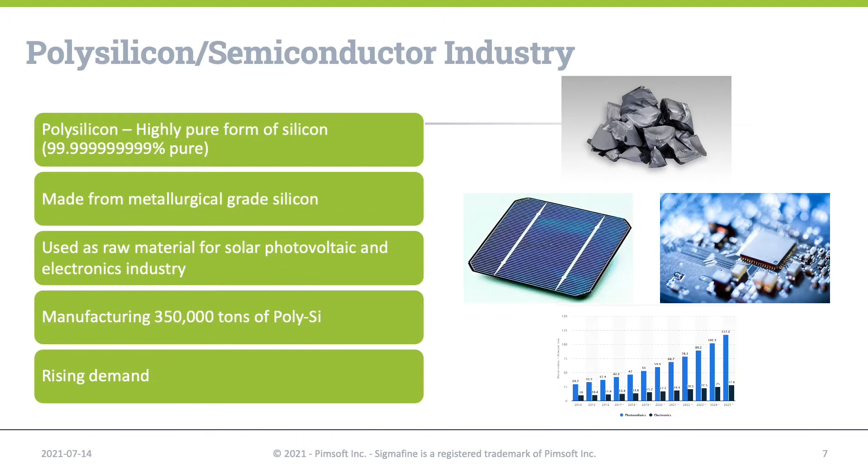Silicon is the second most abundant element found on Earth. Polysilicon is a pure, stable, and crystalline form of silicon made from metallurgical grade silicon. Polysilicon offers properties like other semiconductor materials, and therefore it is widely used in the manufacturing of solar photovoltaic cells and electronic components. Currently, over 350,000 tons of polysilicon is made around the globe every year. And as the demand grows, the production will likely grow with it.

As with many industries, the polysilicon industry has its own set of challenges. Polysilicon is produced in large batches, and there are many intricacies in the preparation and mixing of the reactor feed. Getting the right mixture of the feed is the key to making highly pure product. Also, being able to track the quantities of the movements as well as quantity and quality of the raw material tanks to be able to catch any issues early in the process.

And finally, dealing with an energy-intensive process. Polysilicon is produced with an energy-intensive process which is known as chemical vapor deposition, in which reactors are heated to thousands of degrees Fahrenheit to produce polysilicon. As with any energy-intensive asset in your plant, you want to make sure it is operating with great efficiency to keep the operational costs down.

So before we go any further, let us talk about what Sigmafine is and how it works. Sigmafine is a data quality provider in the real-time digital infrastructure. It is an application that applies a data reconciliation analysis to a model that represents a facility. The data reconciliation analysis is simple. It calculates the inputs minus the outputs minus the accumulation equaling 0.

Sigmafine is configurable to meet your company's requirements. Sigmafine server provides an out-of-the-box set of calculations and analysis like mass, volume, energy, quality balances that can be configured per your needs. Sigmafine has add-ons to extend the basic server functionalities to enhance the user experience. In addition to the add-ons, it also provides extensions for multiple industries like LPG, LNG industries, and domain-specific calculations like energy, thermodynamics, and psychrometrics.

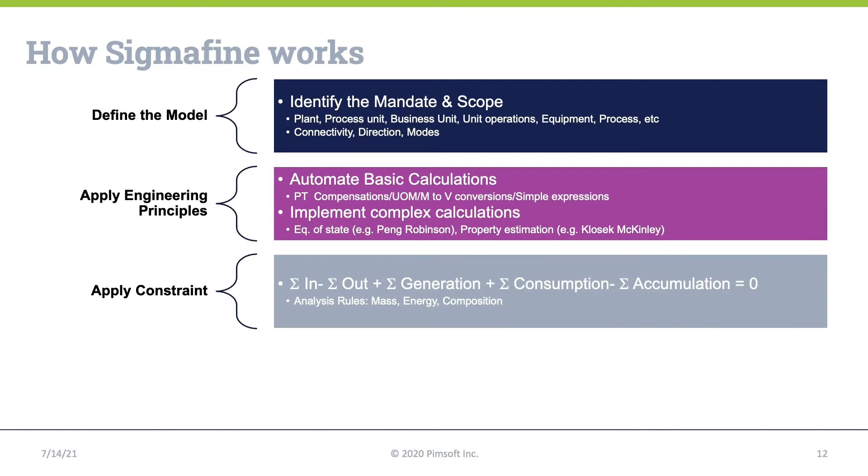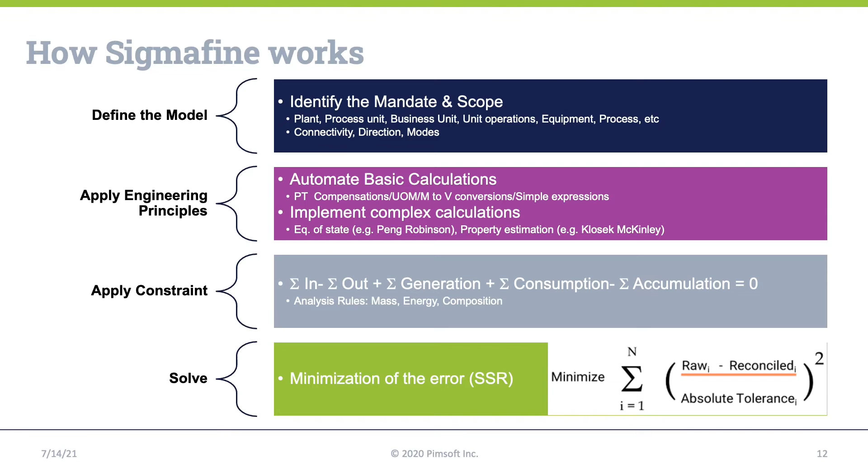After this, apply multiple balance equations to find minimal adjustment to measured data. You can use different analysis rules such as mass, energy, and composition. And then use regression analysis methodology to get an optimal fit of the observed data with minimum adjustments using the equation that you see on the slide. Here we are trying to minimize the errors using tolerances that are set in place.

So you may be asking, how does Sigmafine address the challenges that I spoke about before, and how can it be applied to the industry? Well, with Sigmafine, you can go beyond the normal reconciliation tasks I spoke about in my previous slides.

And lastly, with the built-in energy balance calculation and the thermodynamics extension, you can track asset performance. Now we will see how we can do each of these in the subsequent slides. Let's look at how tracking capability can be used to track the raw materials. Sigmafine does this by the use of material tracking analysis.

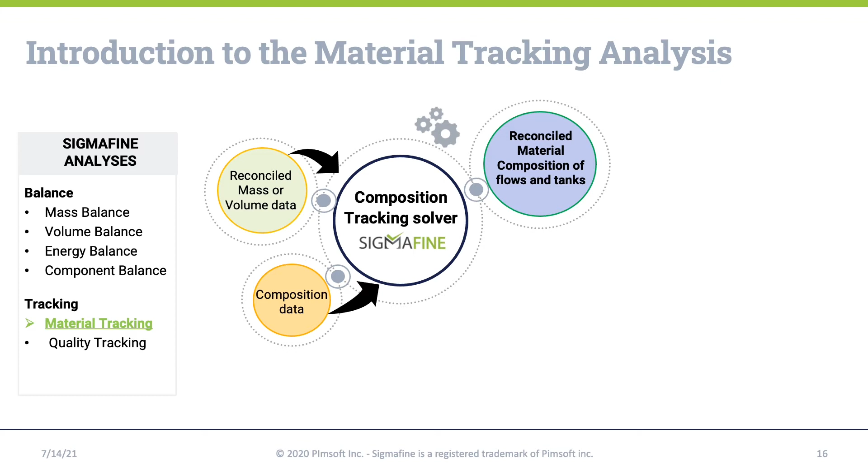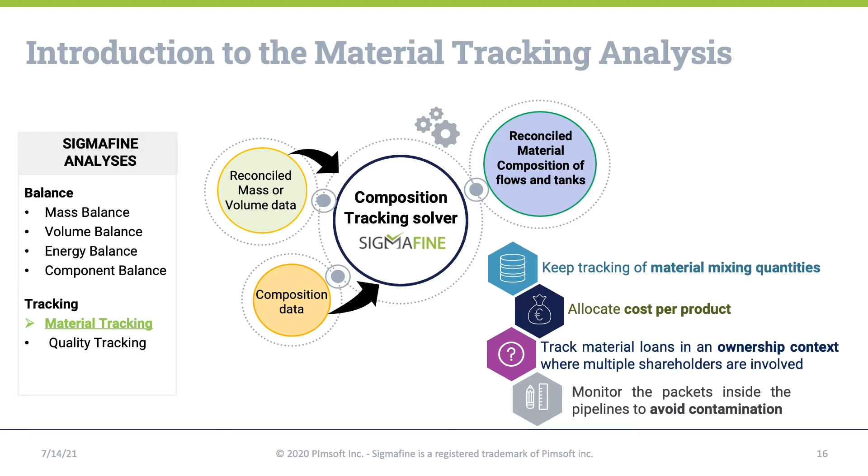This type of analysis uses the composition tracking solver, which brings in all the information such as mass and volume, the input material, and calculates the reconciled material compositions of flows and tanks. The results are then used to keep track of the material mixing quantities, allocate cost per product, track material loans in an ownership context, or monitor inside the pipelines to avoid contamination.

So how does it work? The tracking algorithm considers the following. First step is to execute the balance, the use of reconciled data for good results. Second is to collect all the movements within a certain time. This can be done setting a 24-hour period. Then we decide which elements are part of the calculation. We can use the same model to use for the balance. There's no need to build another model.

In order to calculate the composition of the tank, flows, and the movements, the algorithm considers the way how the materials are mixed in each inventory. In case of inventories that are not directly measured, as this information is not always available, Sigmafine can calculate the inventory based on surrounding measurements, and then tracking analysis based on the results can calculate the material composition. And finally, the algorithm considers the history of the stage. Initial composition of the current day can automatically be taken from the previous day.

As mentioned before, the way materials are moved through the model is defined via a mixing model. You can pick the ideal mixing method based on the type of material and the mixing that will be taking place. Examples of such mixing models are well-mixed model, where you have tanks with homogeneous material, baffled model for tanks with internal baffle, which keeps the input and output separate until the end, makeup purge, where most of the input goes directly to the output line and only the excess is taken from the tank.

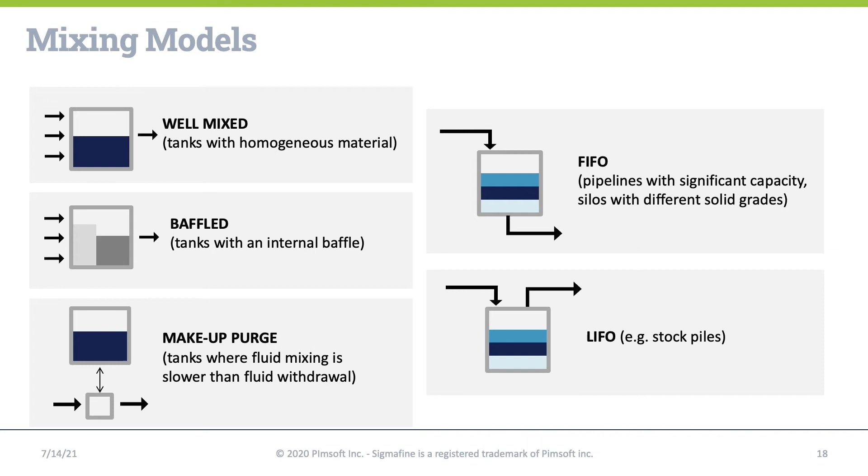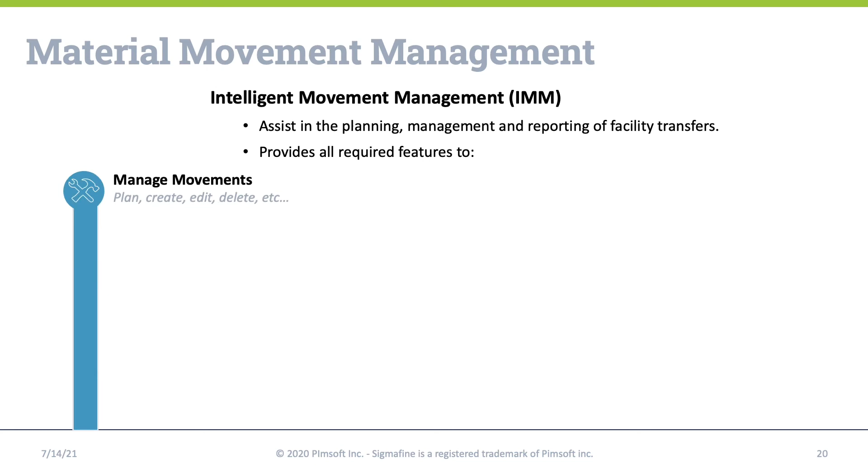Let us see how material movement can be achieved in Sigmafine. Sigmafine offers an integrated way to plan, execute, manage, and report movements of intermediaries and finished products with the help of intelligent movement management, known as IMM. Based on the rigorous mathematical cross-checks, the IMM takes the guesswork out of the movement planning, monitoring, doing calculations, and reporting. IMM tracks the quantity of the movements as well as the quantity and qualities of the tanks in real time. This enables users to detect errors early in the process so a problem can be prevented.

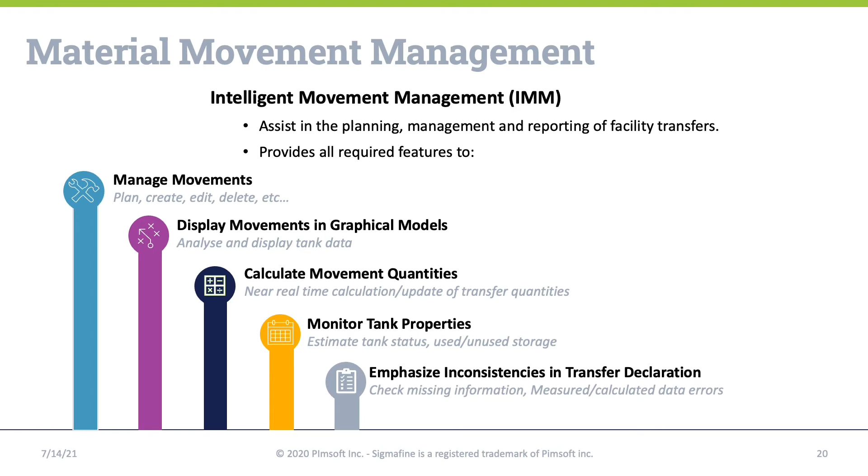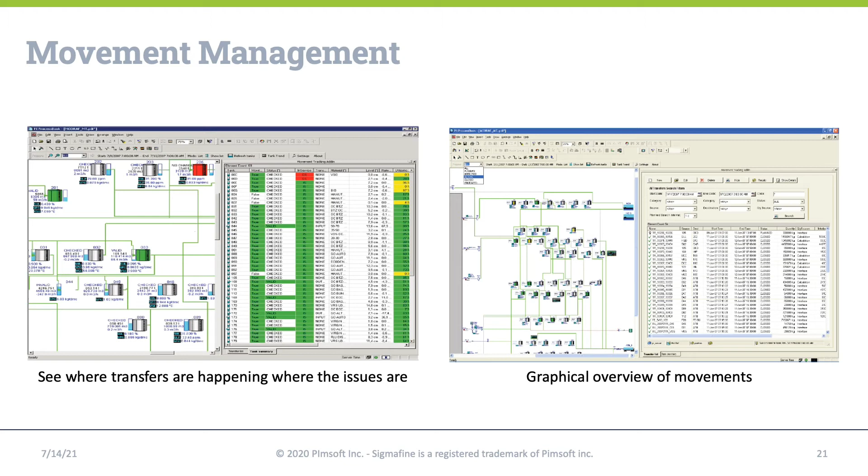The analytical plugins included in the IMM can also highlight discrepancies between process data and manual declarations. Here are a couple of pictures showing how IMM shows the transfers that are happening and where the issues are based on color-coded messages. You can do this for an entire plant or specific areas within a plant. Also, operators have a graphical view of the movement situation from their desk in a familiar environment.

Let us look at the benefits of the IMM. The IMM allows the connection of logistics, operations, and production reporting with one version of the truth. Everything happens in a single package. Also, you can eliminate guesswork, have accurate records of real transfer volumes in real time, catch errors before they happen, and decrease manual labor. Many balance gross errors are screened upfront, alarms raised for inconsistencies between movements and related tank delta stocks.

Intelligent algorithm automatically calculates the quantities by looking at the related model structure. IMM also shares a database with Sigmafine, so it means that the same assets are shown or shared, making declared movements instantaneously available. Also, it eliminates the need to install another system to manage the transfers.

Let us look at some of the IMM benefits. IMM allows you to connect logistics, operations, and production reporting with one version of the truth. Everything happens in a single package. With IMM, you can catch errors before they happen and decrease manual labor. Many balance gross errors are screened upfront. Alarms are raised for inconsistencies between movements and related tank delta stocks.

Intelligent algorithm automatically calculates the quantity by looking at the related model structures. IMM shares database with Sigmafine, so it means the same assets are shared, making declared movements instantaneously available for the collection in the balance model. This allows to eliminate the need to install another system to manage your transfers.

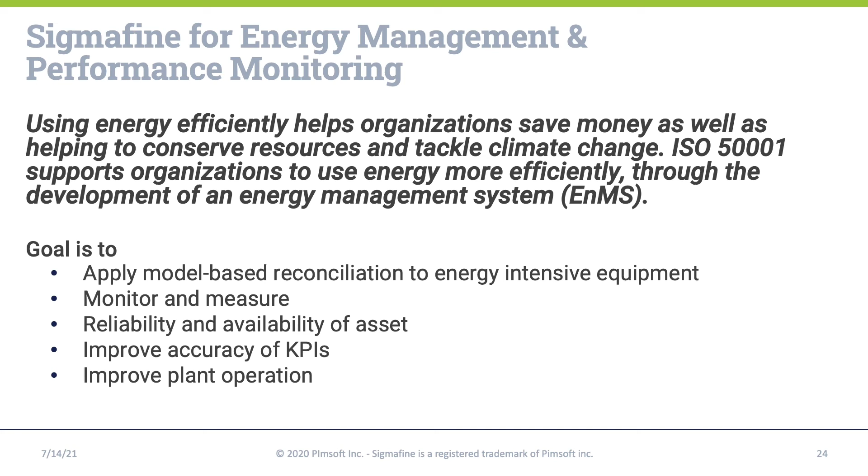The requirements for performance monitoring are Sigmafine energy balance and thermodynamics extension. The energy balance and the thermodynamics extension can then be applied to a model of an equipment to be monitored. It could be a furnace, a compressor, a turbine, heat exchanger, or a reactor. After the analysis is performed, the results can then be made available via company dashboards such as PI Vision or Power BI.

So here you're looking at a furnace monitoring model, which contains different furnaces and the feed of the furnaces and the air and all the other assets. There is an analysis done here for the integrated mass and energy balance where a non-linear solution is applied and the calculations for the thermodynamics are implemented. So we have trustable data that is validated by the Sigmafine analysis.

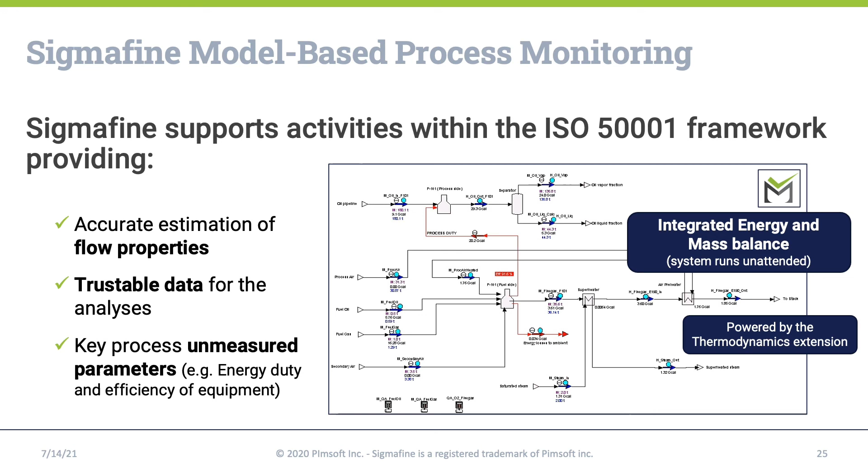An accurate estimation of the flow properties is also achieved through Sigmafine and the thermodynamics extension. So we can finally have KPIs that are calculated and made more consistent by the Sigmafine analysis. Once the data is conditioned, it can then be published via a Power BI dashboard like the ones seen here in this slide, in accordance with the ISO 50001 to support the energy management decision making.

The data is then calculated and automatically aggregated. It helps to improve real-time operations in the control room, support energy managers' daily activities, and lastly, the data can be made available online and/or by mobile devices.

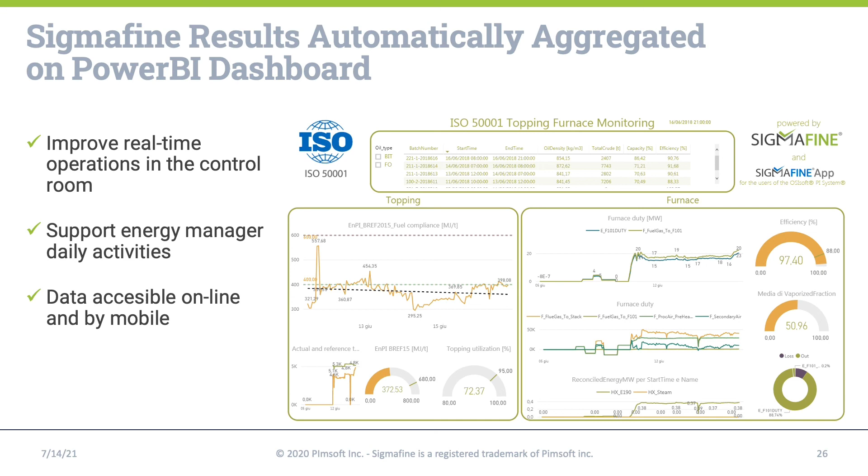Another example of how data reconciliation can improve the accuracy of KPIs. Here we have data for an industrial furnace. On the left, you see raw data that shows the poor correlation between the efficiency of the furnace and the oxygen content in the flue gas. And on the right, after the reconciliation is done, you can see a good correlation between the oxygen content in the flue gas and efficiency. So from here, the engineer can better plan for the crude batches.

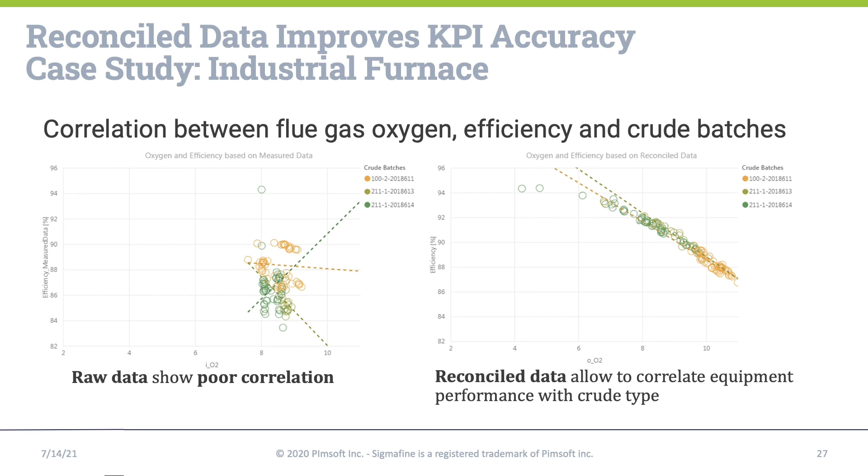So this is what we have covered today. Sigmafine can go beyond the regular mass balance tasks and with the help of different analysis, help with the company needs or requirements, also improve operations and help meet regulatory standards with the help of performance monitoring.